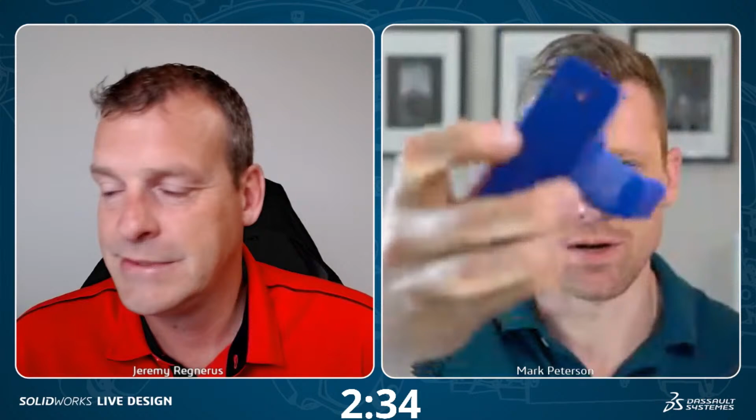Yeah, it's a ton of fun. If you have access to a maker space, or like what I'm going to show today - I got this 3D printer that I stole from Mike Puckett, and it's awesome, man, you can do all kinds of cool stuff. You like the guitar right there? I printed off one of these just as an example, this little holder for it, which is pretty cool.

It's just fun, you can make whatever you want, especially with tools like this, your imagination can run wild and you just start printing stuff. I can't imagine what it must be like if you have kids, they love that stuff. You make a cardboard box - because that's what kids like, right? They start playing with the box the 3D printer came in, like 'this is awesome, Dad.'

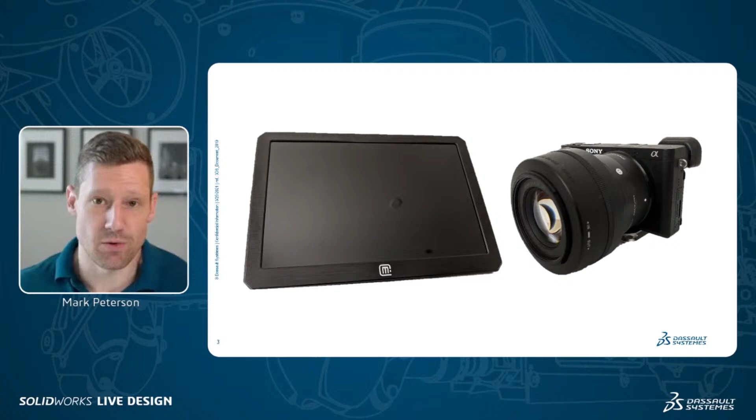So I wasn't using this anymore, so it was just collecting dust in a drawer. I thought, can I just put this monitor on top of this camera, and then I would be able to have a better connection with my audience when I'm doing that sort of thing.

So I was like, okay, well what's going to go in this space? On top of the camera is like a little rectangular input called a hot shoe. And I have this little guy here — let's see if that works. It's got kind of a rectangular profile on the bottom, and then it has a quarter.

Mark, I'm having a bit of a connection issue here. Looks like you froze up a little bit. I don't know if you freaked your camera out by trying to get it to autofocus. Oh, sorry, hold on. Let's see. No, let's see if that. You're good now — it was literally like when your camera tried to autofocus, it kind of glitched. Oh, really?

Okay, alright, sorry about the technical glitch there. So that's the thing we're going to do. We're going to try to create something that's going to work with that quarter-20 thread. So let's get into SolidWorks and we'll get started finally after that huge intro.

Cool, so hey, along the way — Mark, quick question from chat. Joe Zenkis wants to know if this part has been sponsored by Binford Tools. Yeah, definitely. That's — I should have put some plugs in there.

That's funny. Yeah, cool. So along the way I'm just going to pepper in some tips and tricks. A lot of them we've shown on this live design before, but it's always good to reiterate some. So I'm just going to start with a millimeter template, a part millimeter template.

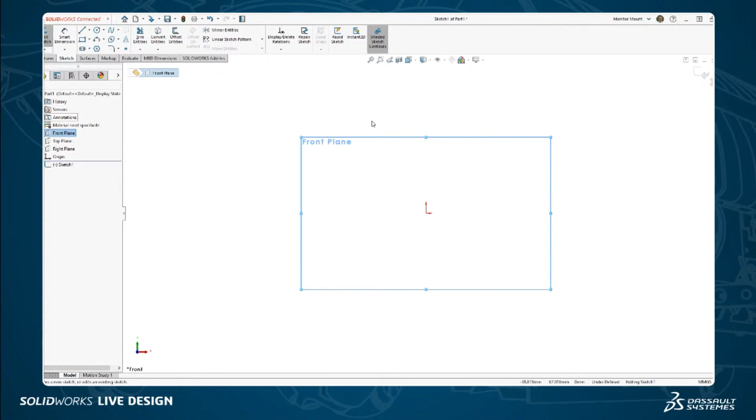The first thing I want to do is design the monitor itself, because that'll give me an idea of what I need to wrap around it in order to hold it. I could just measure it with calipers or whatever, but if you wanted to do this yourself, you may want to use an iPad or something that has curvature, which may be a little more difficult than the rectangular monitor I'm dealing with. So something I always like to do with projects like this is use Sketch Picture, which lets me bring in a picture of something.

So for example, here I can just open this up and I have this monitor. Now in picture format it comes in really big, so I'm going to use the F key on my keyboard to zoom to fit, and so I can actually see this thing — and we can see the monitor.

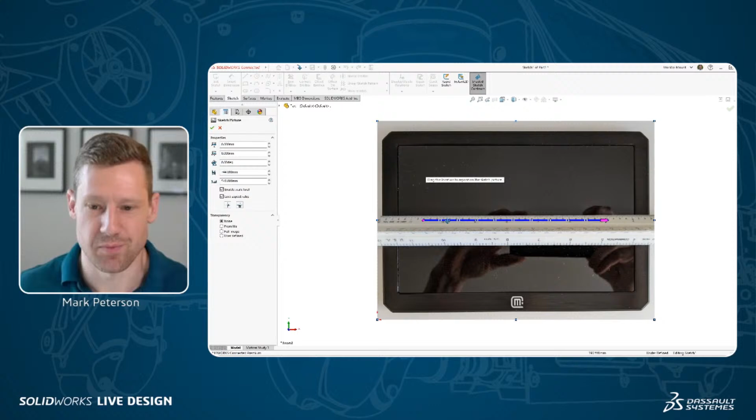And of course, for convenience, I have a ruler or scale that I put on here, and I want to size this to the appropriate size. So what I'm going to do is use the scale tool. I'm just going to drag these handles, and notice it does kind of snap to horizontal, which is nice.

So we'll put this here, and then it's going to ask me for a dimension. I'm sure many people have seen this tool before, but to me it's such a great tool — you just snap to something and you already know exactly what the dimension is. So we'll say that's 220 millimeters. Of course, it flies off into outer space, so I have to hit F for zoom to fit again, which is wild, but that's okay.

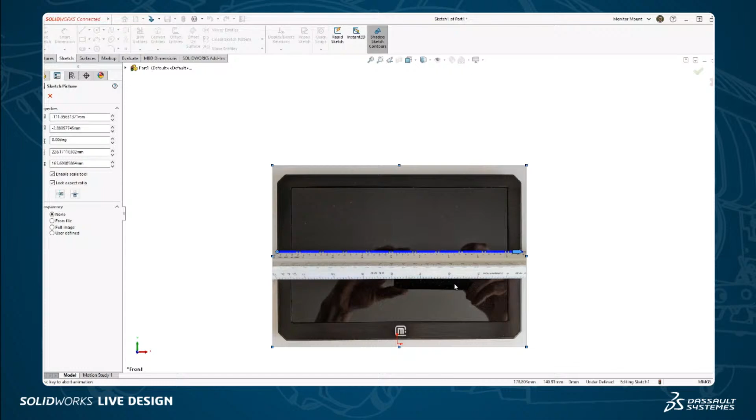We're going to kind of move this thing over, Mark. That's a really cool tip — the fact that you put your scale, your ruler, on top of the device before bringing the sketch picture in. I absolutely love that, that's a great tip for people who use Sketch Picture. Yeah, absolutely, it just gives you something that is the exact right dimensions.

So that's pretty much most of what we need to do here. I do kind of want to have this somewhat either centered or something.

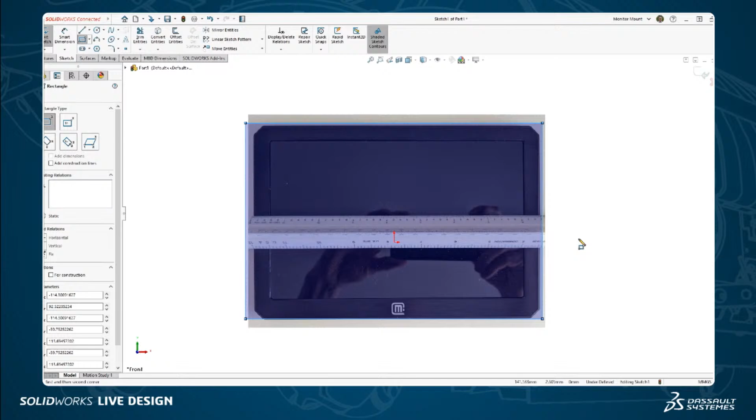So maybe I'll do some centering, but how do I know exactly where the center is? I can do some sketching in here. Let's just create a quick rectangle, something like that. This rectangle is fine, but it's not going to help me center anything. So let's try that again.

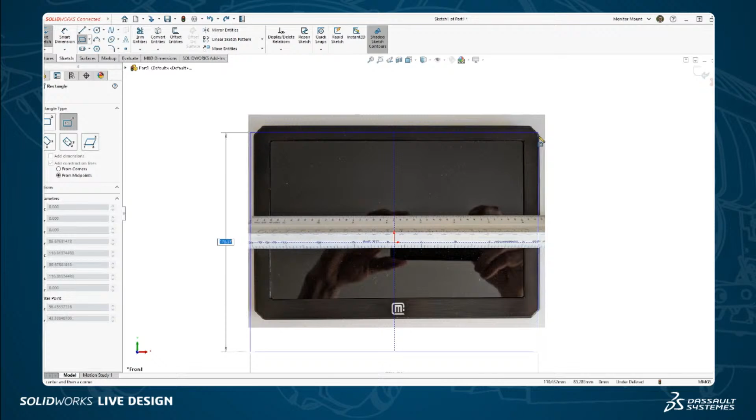I'm using my S key here to bring up this shortcut, and I have this drop down that lets me choose different types of rectangles. Instead of doing just the corner rectangle, I'm going to use the center rectangle, on this origin. The idea with this rectangle isn't to have the exact right dimensions, it's just something that gives me a gauge I can use to center my picture on. So I have a rectangle here that's about the right shape.

It's not super important, I want to get back into that sketch picture. So I'm just going to double click on the sketch, and drag it around until it's about in the center, which I think is right about there. Again, it doesn't have to be perfect, we just want to get things about right. Okay, I've got that. I don't need this rectangle here anymore, so I'm good. I'm going to exit my sketch.

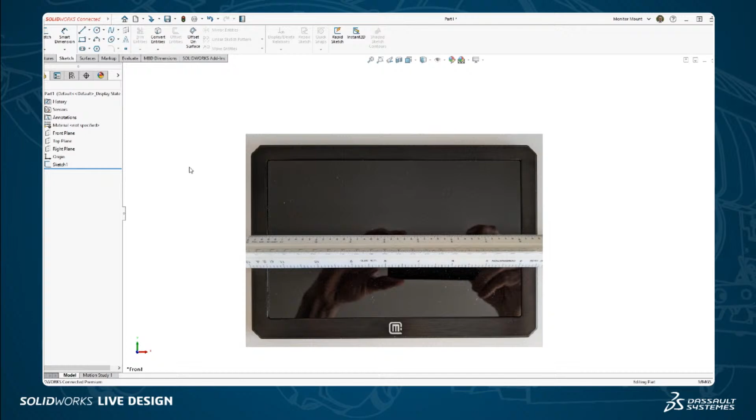Now, a lot of people might go ahead and just start sketching around this in the sketch where the sketch picture is located. But a real big tip here when using sketch picture is to only have the sketch picture in that sketch. The reason why is you can come in here and hide this later very easily just by selecting the sketch and choosing to hide or show. We're going to be using that a lot, especially when we do sketch picture.

So that's the front of it. We do want the profile of the side or the top, so let's choose our top plane. We'll sketch here, and again we're going to use the sketch picture tool. And if you're wondering how did I get sketch picture on this toolbar, we can customize any toolbar inside SolidWorks, it's highly customizable.

So of course we'll go here, and if I want to search for something like sketch picture, I can just search for it and then drag and drop these on here. And if you don't want it on there, you can just pull it off and get rid of it, you see my little X next to my cursor. And because of that customizability, I can put extruded cut in there.

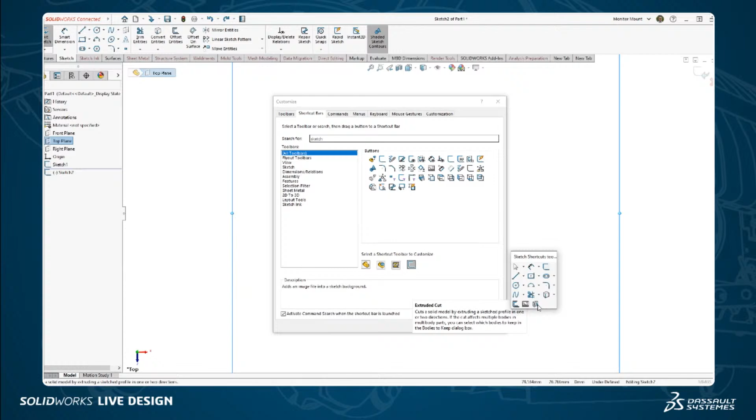Hold on a second, Mark. We have an interesting comment from Mike Puckett in chat, and I think this is a great question to ask the chat. Mike says S keys greater than mouse gestures.

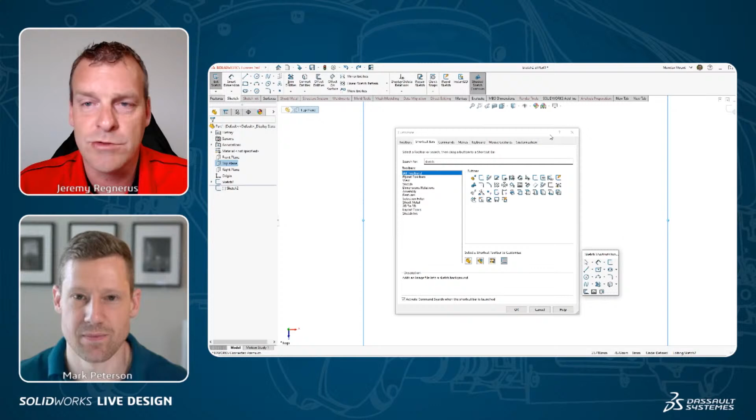So I have a question for the chat. If you use the S key, press 1. If you use mouse gestures, press 2. If you use them in combination, press 3. Let us know what you're using, S key, mouse gestures, or both, 1, 2, or 3. That's a great comment, Mike, because I'm not going to go into the debate about which one's better, but I'm curious what our users use more. Press 0 if you don't use any of them.

Sorry Mark, keep on going. No, I'm interested in the results as well. I use the S key a lot. I think the benefit to me of the S key is if there's not a command in my shortcut toolbar, I can just start typing and the command will come up in command search, which is nice.

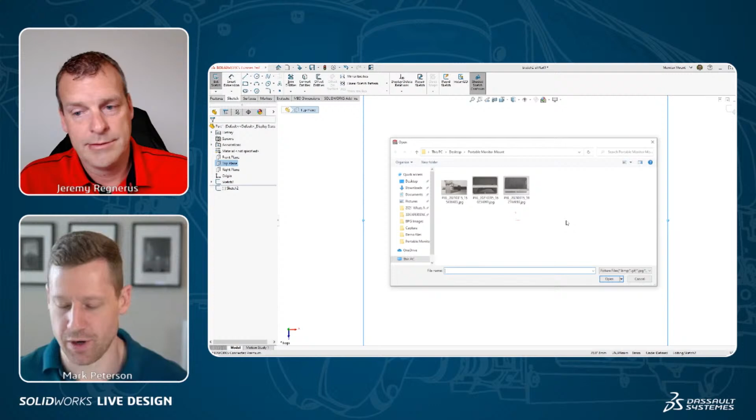So okay, let's get this other sketch picture in here. And you know, sorry, one other thing I want to do here, let me just close this out. Okay, let's go back to this original sketch. I do want to have a midpoint line in here, and you'll see where this line is going to come into play in just a second. So I just want this midpoint line in here, and that's also going to be 220. I'm going to use this line to snap my new sketch picture to.

So let's go to our top plane, and we're going to repeat our sketch picture. So I have this one here, we'll open that up, and again it comes in pretty large, so F for zoom to fit. And I have a pair of calipers here.

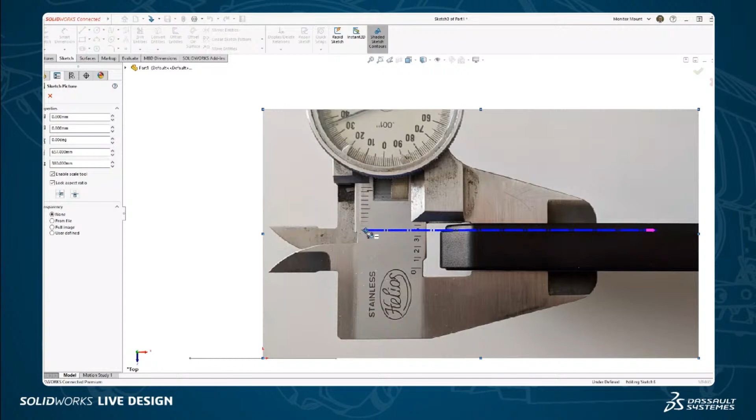So I'm just going to use the ruler on the calipers, which is going to be pretty convenient. I'll just drag and drop this onto here. That's going to be 10 millimeters. And we can kind of move this over here.

Now the orientation, because of the way I took the picture, the front of the device is up here near the top. But that's okay, because in the sketch picture properties, we have options to rotate and turn things around. So for example, if I want to rotate this around, I just type 180 degrees and I can move it around. So it's very versatile, being able to use this tool. I'm just going to kind of drop that again. It's pretty close to in place somewhere, something like this. There we go.

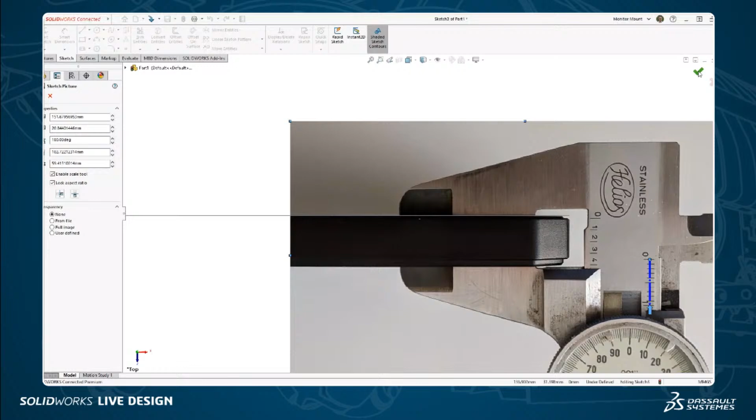Perfect. And again, I'm going to exit that sketch because we don't need to have any other sort of sketch elements in our sketch picture. So there we go. So we have those two in there and we're ready to start designing.

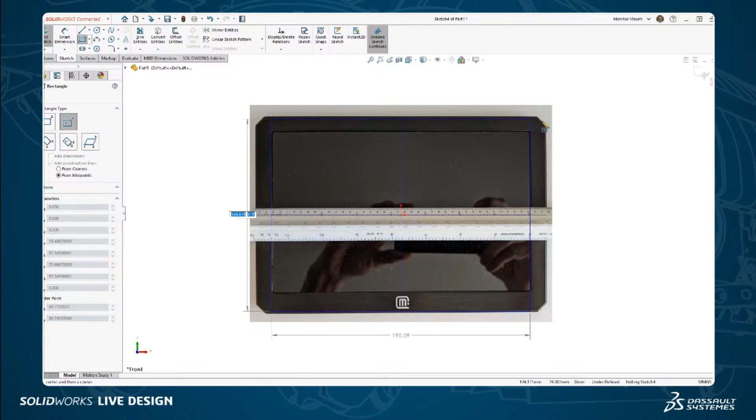Let's go to our front plane and we'll sketch here, and we can do our center rectangle tool again. We'll pull out a center rectangle and get it just like so. You'll notice that the picture doesn't line up with the sketch. And the problem isn't the sketch - the sketch is truly accurate. It's the picture that's the problem. Most cameras have some sort of bend or angle to them, depending on how you take the picture. So don't let that get in the way of a good time here.

So all right, let's add some dimensions. We know that this one is 220 for sure. We don't know the vertical one, but it's very close. Let's say 130 is about right, and we feel pretty good about that.

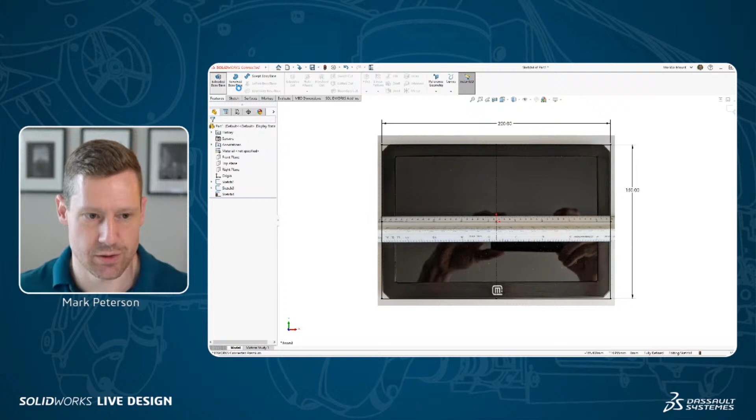And so let's extrude this. So we go to features, we'll extrude that. And of course, we have our sketch picture here, and we can even use this to determine how much we should extrude. So should it be 11 millimeters? It's about right. Maybe 12 makes more sense. Maybe 11 and a half.

Mark, I love your use again of a measuring device on your sketch picture. This is like a really cool tip. I know you've been working for a little bit, I'm kind of going back to it. I like how you actually put the measurement on the calipers themselves. What a genius way to get your scale down. Yeah, the whole point is try to get as accurate as possible with these. In a lot of cases when you're doing sketch picture stuff, it's usually off of a drawing, and they're sort of giving you dimensions. So it's very infrequently that you would necessarily have to use it in this way, but sometimes you do, and this is a great way to try to get as accurate as possible.

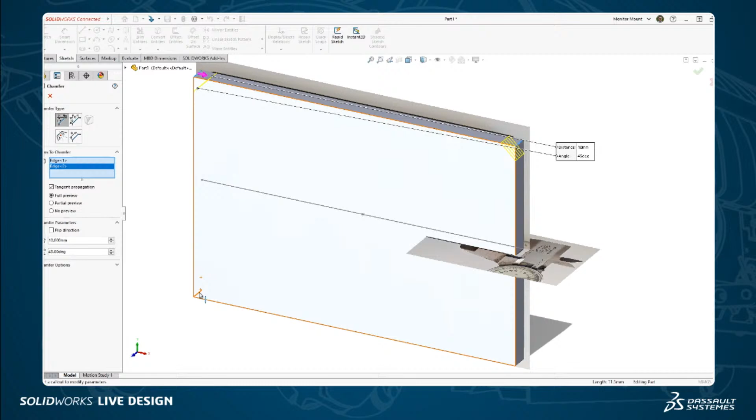So, okay, cool. This device has some chamfered corners. So I'm going to select this edge and choose chamfer. I love doing chamfer this way just because it's very easy - I already know what edge I'm going to select, so I just put the chamfer on there. I'm going to select these different edges. I love in SolidWorks how you can just pick through geometry. It highlights that edge for me, so I don't have to rotate things around or anything crazy like that.

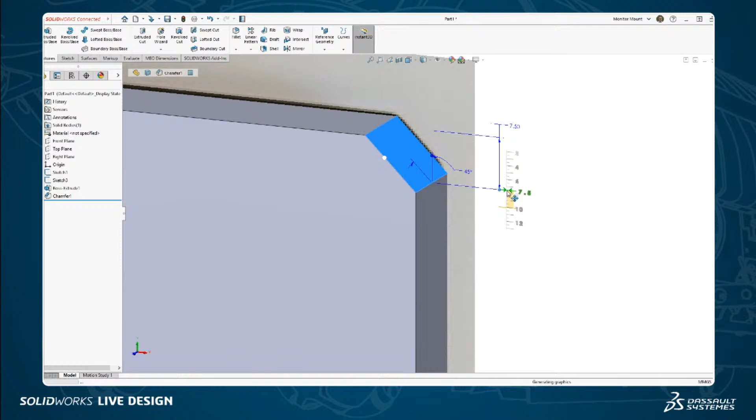And then we'll confirm. Now we'll see from my sketch picture that my chamfer isn't quite right, but I'm going to use Instant 3D. Just so everybody knows where that is, on your features toolbar, you've got this Instant 3D here, which means I can grab this blue orb and I can just adjust it. I can drag it against this ruler to get these exact numbers, or you can kind of freehand it if you're left of the ruler. So notice I can go as fine or as granular as I want to on this. I'm going to make it like 7.5, something like that. Just put it in there.

I'd also like to fillet these edges here. So let's go ahead and get those fillets going. Now 10 is going to be a little much. Let's maybe make it 3 or something. And notice when I click on another filleted edge, I do get this pop-up here. So I can kind of zoom out. So when I click this edge, we see that I get this pop-up - this is my little fillet selection helper.

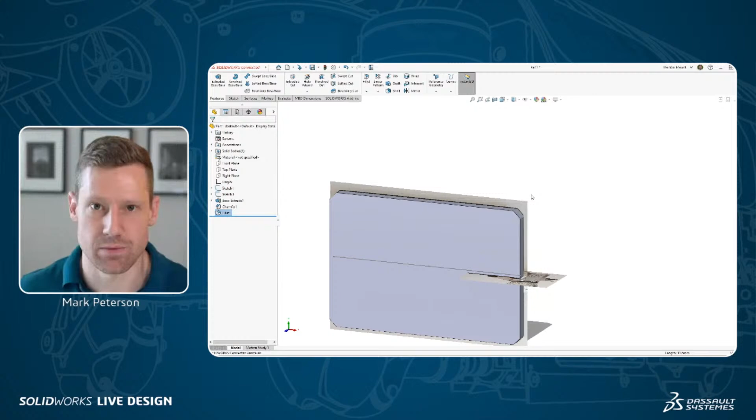Notice that it's going to collect all 6 edges that I actually would have selected myself manually, but it's going to do that all in one go. That's just a super handy tool for us designers, it saves us a lot of time.

So Mark, we've got our results in, and it's 3. A lot of people use a combination. Mike Puckett said maybe he should have bribed people with some CSWP certificates to vote on his side. But that's great, I love seeing that a lot of people are using all the tools that are going to make their lives faster as much as possible. So that's really good. And then Brian Zaya said 3, but 1 is awesome, especially in 2022.

Did you watch 3D Experience World virtually, Mark? I watched it all week for like hours and hours and hours, I don't know if I even took a break to eat. If you're watching at home and you haven't watched the technology previews or the don't miss this demo sections, go back to 3D Experience World and watch those technology previews. There's a really cool enhancement coming to the S key in 2022. Yeah, definitely go watch that for sure.

Okay, cool, so let's continue on now. I'm going to hover over my solid object and hit tab, it hides it for me even in part mode. That used to only work in assembly mode, and a couple of years ago the developers changed it so we could do this in part mode.

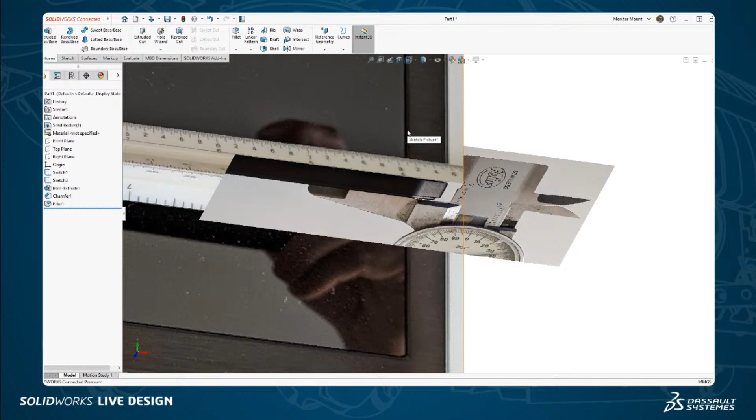You'll notice there's sort of this feature here that goes around the face of the part, it's kind of like this indent. So we want to replicate that. I'm going to use Shift Tab to bring my part back, and let's go ahead and start sketching on the top plane. Now this is actually here, so let's hide it again using Tab, and I'm just going to use my line tool to kind of create some geometry here.

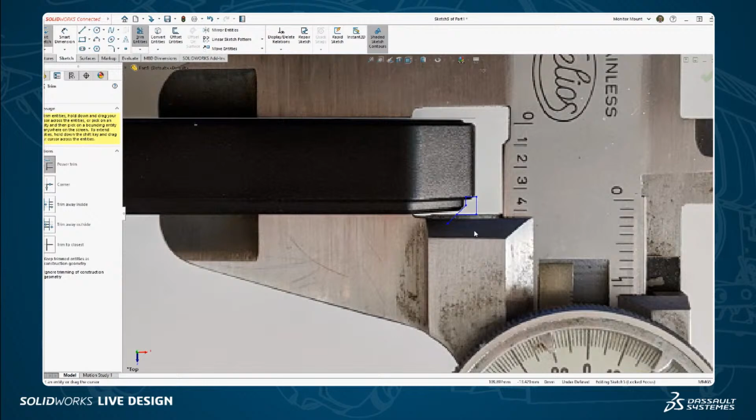Doesn't have to be perfect, but I just want to create a little bit of a cutout. So let's do something like this. There we go, I guess a little extra piece here, I'm just going to trim that out using my trim tool. There we go, it doesn't have to be perfect, I'm just trying to get something that's relatively close. And actually I do have a little bit of something here, so let's do that. Sorry, I'm making a mess of my sketch here. Normally I'm way smoother than this. All right, I'm going to just merge these two together. There we go, so now I've got some sort of thing here.

We really want to make sure that we always fully define all of our sketches. The reason for that is because fully defined sketches are a lot easier for our CPU to process. If we have a bunch of underdefined sketches, there can be some complications for our processor, and it could make our parts slow and perform less well.

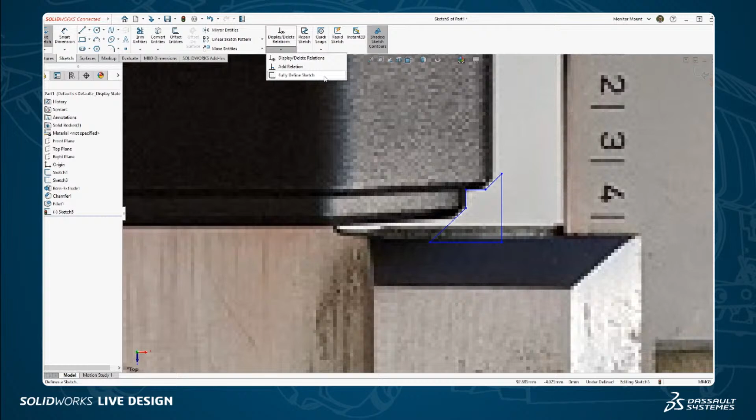However, I don't really feel like fully defining this because it would be a lot of work. So this is a tip that I use sometimes when I'm just trying to get something done. I don't recommend doing this in production all the time, but if you're just playing around, it can be pretty useful. On your sketch toolbar under display delete relations, there's a drop down, and there's this tool here called fully define sketch. It's a way that I can just define the sketch by hitting calculate, and everything is fully defined and we're good to go. Again, I wouldn't always use this in production, but it is kind of nice to have it here.

A good example where you might use something like that, Mark, is you download a part from a supplier catalog and they didn't fully define it, but the geometry is what it has to be, and you just want to lock everything down. I agree with you, you should never have minus signs in front of your sketches in the feature manager tree.

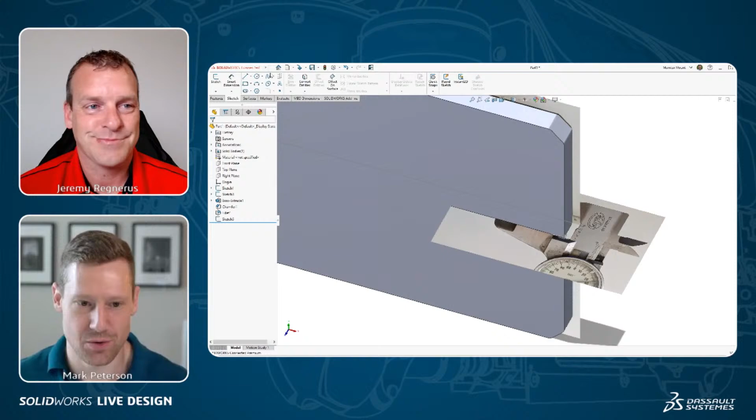So I'm using it here, and we're just going to do a quick swept cut. I'll go to my features tab, choose that as my sketch profile, and for my path I'm just going to select this edge. It's only going up to that corner.

Let me expand some of these options here. There's this tool called tangent propagation, which means any tangency will just continue along that path. And then we can make that little swept cut just like that. Pretty nice to have that in there.

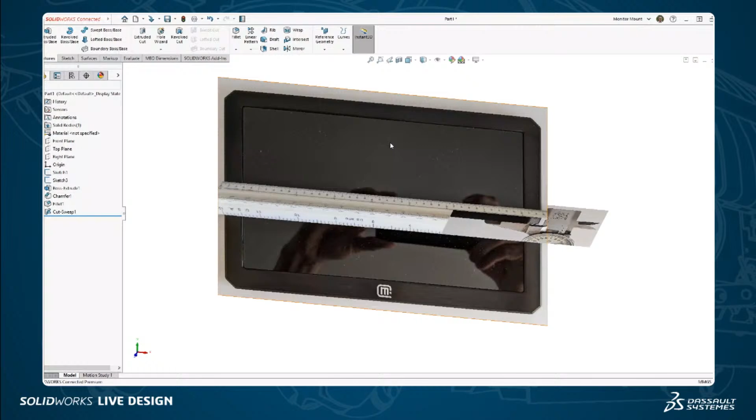This is starting to look a lot more like my actual monitor. However, it's missing a screen, so we can create something like that. My solid is kind of in the way, but we do see sort of what that screen is supposed to look like. So let's sketch on this front plane, do an offset entities, reverse that direction, hit check, and confirm that.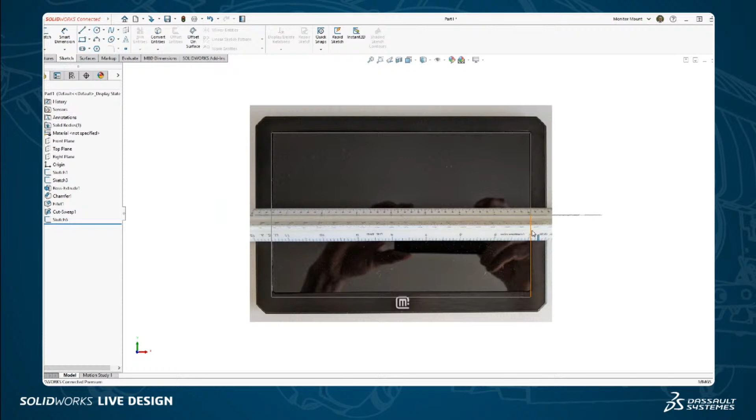Was I close? Yeah, that's pretty good. Ooh, and we're very close. Yeah, we're not trying to build a rocket here, so I just want something that's somewhat similar to the design. Let's go ahead and do a quick extruded cut.

We'll select that, and it needs to be maybe a millimeter deep or something. Okay, cool. Now that looks like a portable monitor. That looks pretty good. So this is something we can now use to create our little stand for our monitor.

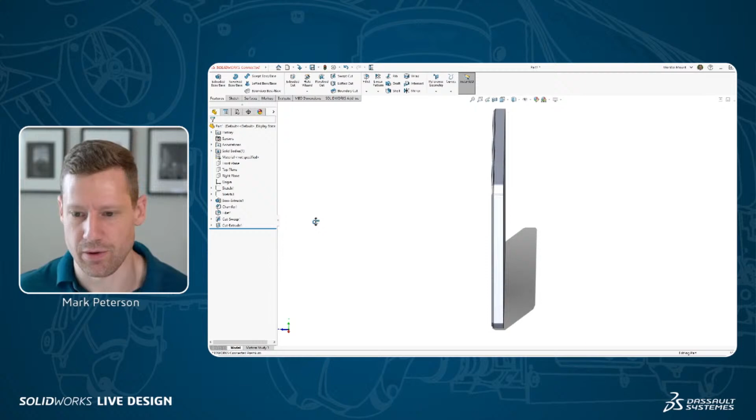Remember, I have all these sketch pictures in here. I can just control-select them and hide them if I don't want them in my view. And now my view is nice and cleaned up. That's another reason why we only put one sketch picture in the sketch, nothing else.

Okay, so now for the part that's really fun, which is to create our cradle. So what I'm going to do is go to my right plane, and I know that I want to do an extrude.

Something I've done is customize this menu to include an extrude or cut. This is a nice quick shortcut, because most of the time we create a sketch and then go up to the command manager to find the tool. If you're always using extrudes and cuts, you can just start with an extrude. There we go, I'm going to do that again.

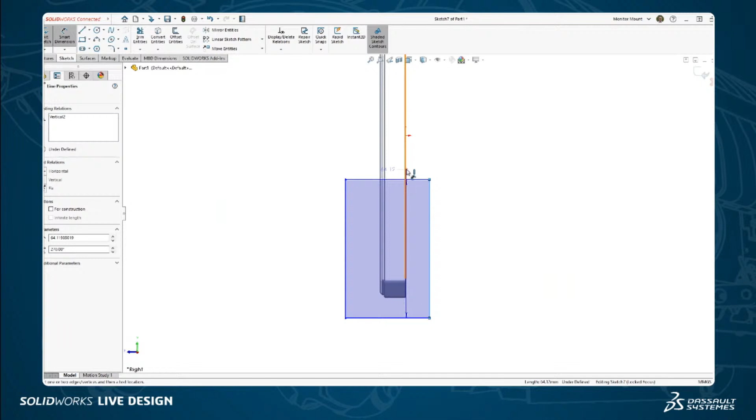That's going to give me a chance to create my corner rectangle. Good, so this is kind of what I want it to be, but I want it to be maybe 2 millimeters thick. Let's grab our dimension tool, and I'm just going to dimension off this geometry. We'll say that's 2 millimeters from that edge, and 2 millimeters from the front.

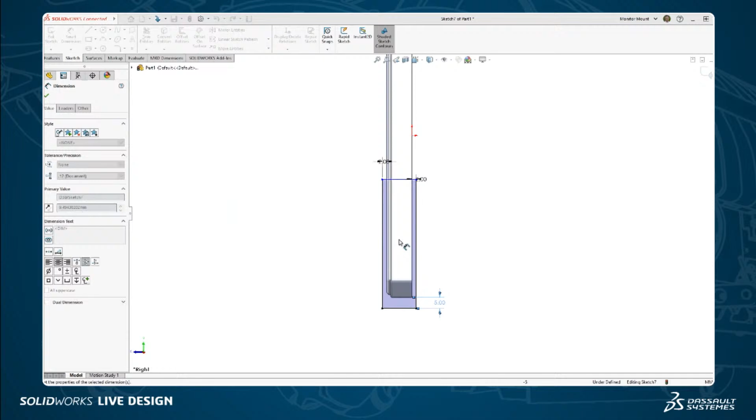On the bottom, however, I need it to have a little bit more because of that quarter-20 thread. I want it to have some space to thread into, so let's make that 5 millimeters. And let's give it an overall dimension, let's just say 30 for now. Of course, we can always change this.

So now, Mark, I notice you're starting to design the cradle within the same part that you modeled the monitor in. You're not using an assembly. How are you going to mitigate these parts just merging into one giant solid?

Yeah, that's actually a great question. So as soon as I exit this sketch, we're going to see that extrude property dialog pop up. I'll use my D key to bring the confirmation corner to my cursor—just another time-saving tip, the D key on your keyboard, D as in David. And now we have our property manager here on the left-hand side.

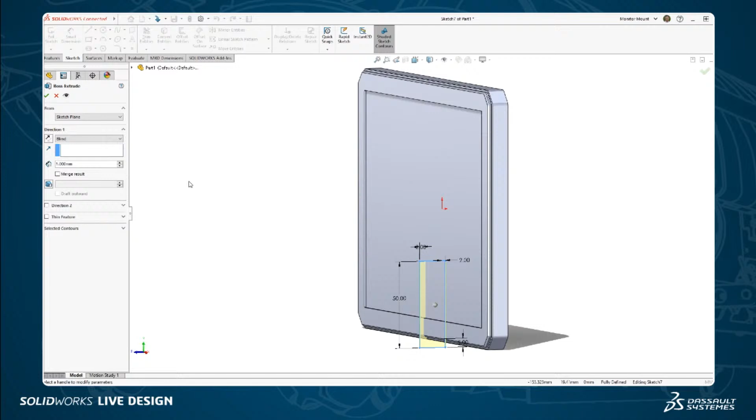By default, SolidWorks is going to ask you if you want to merge the result of these two solids. If we did that, it would just make them one chunk, one single entity, and we don't want that in this case, just like you were pointing out, Jeremy. We actually want them to be two solid bodies. So if I uncheck this box, we'll see it's going to have the two solid bodies in here, and then we can use some Boolean methods to subtract, for example. So, okay, let's create that solid body.

I don't want to do blind. I could just say I want it to be blind up to some amount. But remember, I want my wall thickness to be the same all around, to be consistent. So really what I'm looking for is for this face to be extruded just 2 millimeters beyond this one.

This is where we use our drop down for our end condition and build in some design intent into our design. I have a lot of different choices here, but the one that's most appropriate for this use case is offset from surface. I select offset from surface, I select the surface I'd like to offset from, and then I say I want it to be a 2 millimeter offset.

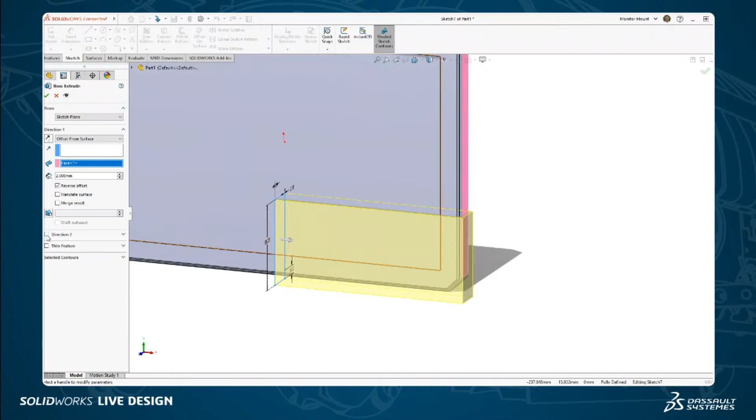The offset is going towards the inside of the part, so all I have to do is reverse that offset, and now it's sticking out beyond the part. No matter how big the part grows or shrinks, it'll always maintain that 2 millimeter distance. That's what we mean by design intent. How do we expect it to change in the future, and how do we want our body to change?

I want to do the same similarly to the other side. So for direction 2, offset from surface, we'll select our surface, choose a 2 millimeter offset, and reverse that to the outside. Okay, we confirm that. And I know that there are two bodies in my part, or in my environment here.

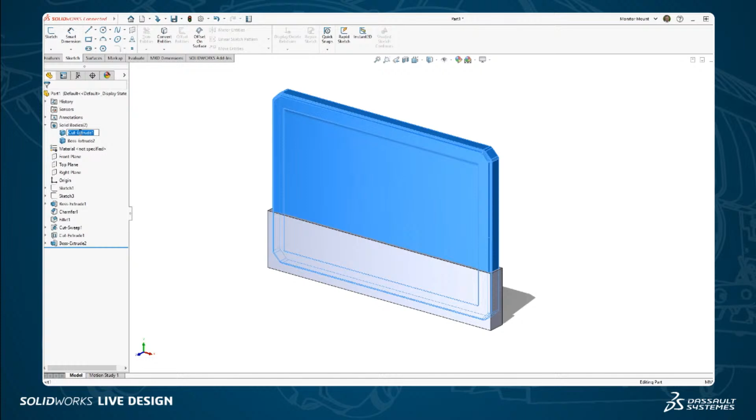There's a couple of ways I know that. One, we have a solid bodies folder here in the feature tree, and it does show both of my solid bodies. In fact, I could even go in here and rename these. I could call this monitor, and I could call this cradle, for example. We can name those, and that's a nice feature for us to be able to do. Another way that I know I have two solid bodies, and I might ask the chat, but...

we are moving pretty slowly on time, so I'm just going to move on with it. But notice that there's hard edges, like these dark edges here, on these parts, but where the parts intersect with each other, there's no dark edge there. So it's just kind of like gray. That's another way that you know these are two separate solid bodies inside your workspace here.

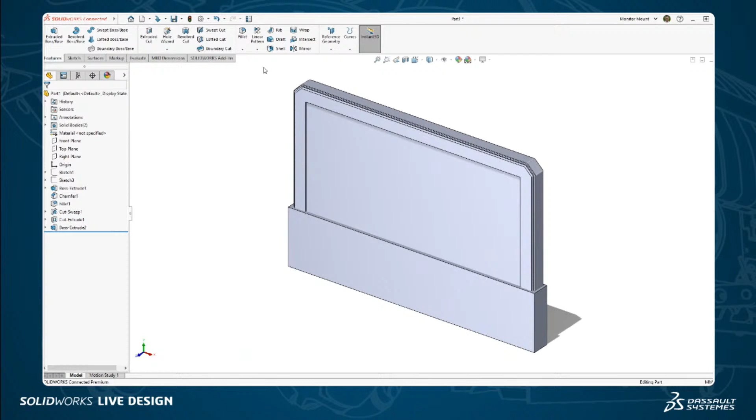Okay, so what we want to do, of course, is subtract from the top body. We want to subtract the top body from the bottom body. In SolidWorks, there's probably 3 or 4 different ways to do this. Just for convenience, and just because I like this tool, I'm going to highlight the intersect tool. So the intersect tool allows you to just select however many different bodies you have there, and it's going to create regions that they intersect, that they overlap, and that they don't overlap.

All I have to do is just select, in my graphics area, the items or the kind of areas or regions that I don't want in my final part. So here you can see this is just a very quick way to do sort of that subtraction method. And now I have just the sort of cored out body there.

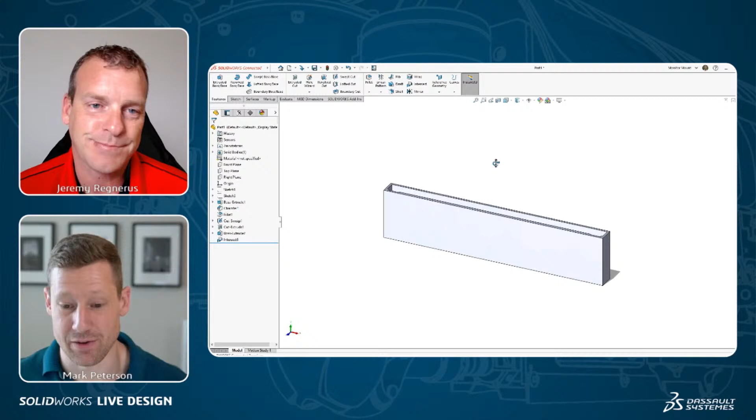Pretty cool. Okay, we do want to create some more geometry here. For example, the front part of my screen, you don't really want to be blocking your screen there, right? Also, right now, because you subtracted that, it'd be pretty hard to get that in there past that lower lip. That's true, yeah, and the lower lip would kind of interfere here as well. Yeah, so what we want to do is just want to kind of cut that out. Well, let's do it this way.

If I select this face, which is the exact geometry I want to cut, and choose to do a sketch here, notice that face is still selected. So I can go right to converting entities in my sketch, which pulls in the outside edges of that face into my sketch, and then go right to an extruded cut.

Right click through all, right click to confirm, and there it goes. It's gone like magic. So that's a really quick way to get rid of that material I don't want to see anymore.

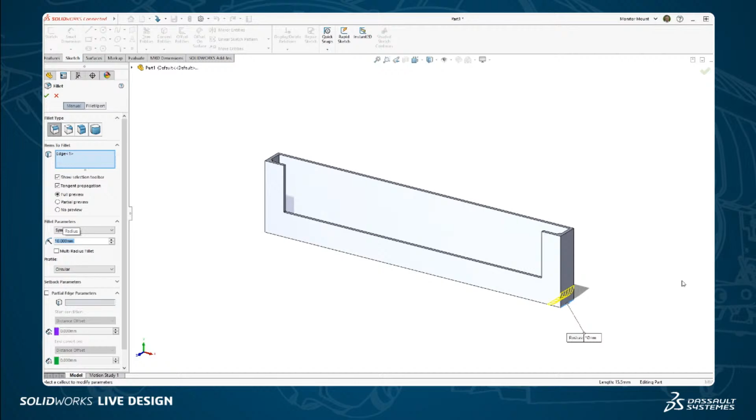Some other things we want to do, maybe round off some of these corners. So we'll do a quick fillet here. Let's say, is 10 too much? Who knows, maybe not, maybe so. Looks pretty good to me, Mark. I think it looks all right.

Jeremy, I'm having a hard time grabbing this edge here. This can be a big frustration because SolidWorks doesn't know what I want to fillet. It's thinking it could be any one of all these edges, but unfortunately I want to fillet the smallest and thinnest edge that exists in the part. So how do I grab that? It's trying to give me all these faces and stuff.

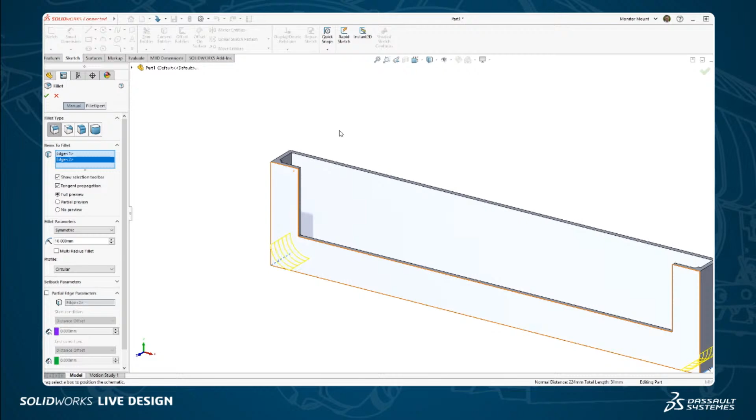Well, one way to do it that I like to use is selection filters. I have a keyboard shortcut, default for everybody, it's the E key, as in Edward. If I click on that, notice next to my cursor I have what looks like a purple tornado - that's actually a filter, and it allows me to only select edges. It makes selecting that edge super easy. So I have that. Boom, there we go. Now I've filleted those things off.

And this is actually starting to look like a real part. However, no matter how much I shake my mouse, that thing doesn't go away, so it's still attached to there. So how do you get rid of it? Sometimes what a lot of people will see is they'll accidentally hit a key on their keyboard, and they'll have this filter there and not know what they're supposed to do with it.

So there's a couple things I'd recommend, and they're either going to be the F5 or F6 key. If you hit F5 on your keyboard, you're going to get this filter, usually it shows up down here - mine's always on the bottom of the screen. So you have this UI you can use to get rid of them. F5 will get rid of that again, or you can also hit F6, and F6 will just clear out any selection filters you have.

So if you're writing anything down at home today, I'd say that's a really good one. F6 is like the key that gets you out of trouble a lot. I can't tell you how many times I've done that - I hit V or E or something like that, and yeah, exactly.

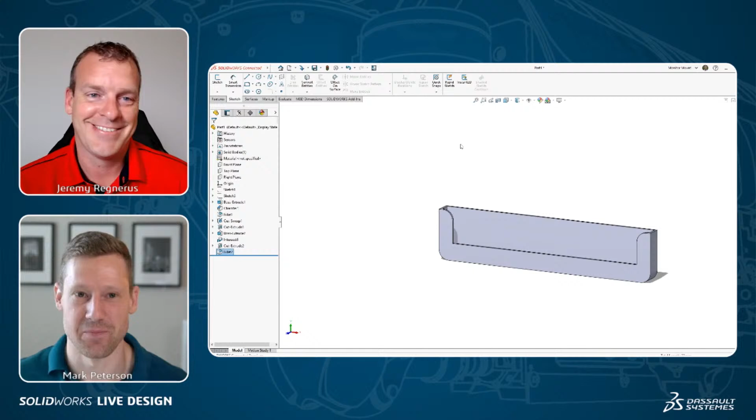Okay, we're almost done with this design. We have one last thing to do, and this is where I introduce the thread tool. I think this is just a really great tool. However, before we do that, I want to create a hole using the hole wizard. So let's go to features, hole wizard, and I'm just going to get this prepped up. Hole wizard, for anybody that doesn't know, is just a library of hole types you can access - countersunk, counterbore, all that. It's all built into the SolidWorks interface.

So what I want is this straight tap thread, and I can choose from a lot of different standards here. ANSI inch makes sense for me in my case because I have a 1/4-20 thread that I'm planning to thread into this thing - it's going to be a tapped hole. You do have some options here as well, sizes range from very, very small to very, very large. I have 1/4-20 is what I'm looking for. Again, we can choose things like the end condition, as well as near or far side countersinks. In my case, a near side countersink would be helpful as you try to get the thread started.

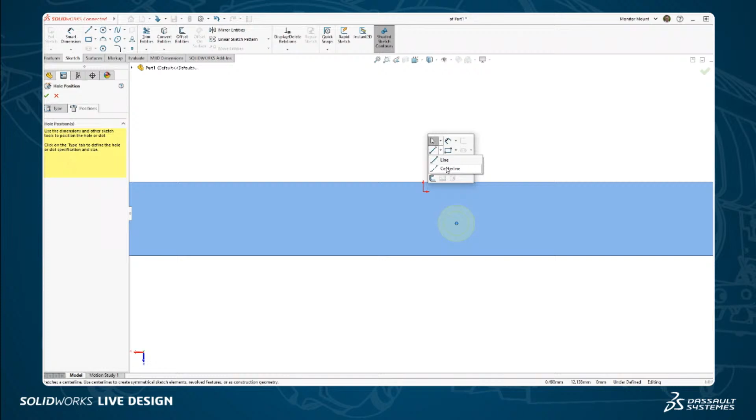Let's go ahead and do that. I have all my settings set. Let's go to positions - all I need to do is select the face I'd like to position the thread on. Notice it gives me this preview. I'm just going to drop this in here, and it's going to place a point in this sketch it's creating on the fly. You can put as many of these as you want, but I only need one, and it needs to be in the center. Nothing's going to stop me from using my S key to access some sketch tools, and I'm just going to create a quick center line by hovering over that edge and grabbing those midpoints, so I know it's going to be right in the center of my part.

Then I'll grab my point, which I can drag anywhere, and just hover it over that line. It's going to reveal that midpoint of that line, drop it right on there.

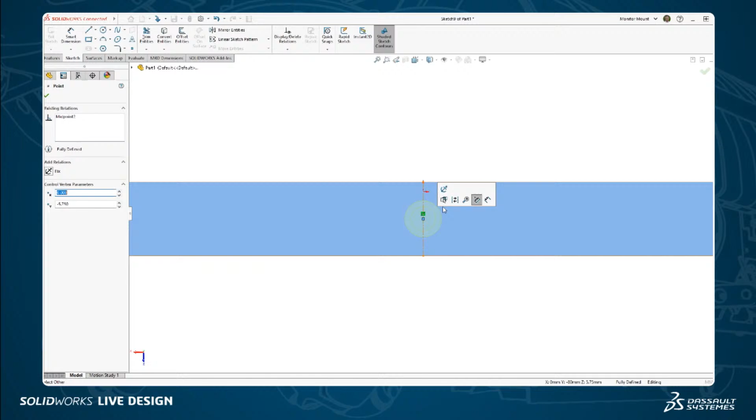So now we got a couple comments about the filters, Mark. I think people like that. Eric likes the term purple tornado, and Mert Kapkin says that filter icon drove me crazy last year. So F6, I'd put a Post-it note right on your monitor to remember. Yeah, that's how you get rid of that. Yeah, but don't use it like most people do as your password. It's not a very secure password.

Okay, so we have this here. Now we could 3D print this part, and that would be fine. However, notice that the threads are not going to engage very well here. There's going to be some material, so I'd have to thread it myself. And me personally, I don't have a tap and die at Casa del Mark. So I have to do something different here.

And this is where the thread tool really, really helps out. So yeah, I mean, think about it. So for most people, the hole wizard is where they need to go, but you're dealing with a very unique manufacturing process where you need to actually be able to print those threads out, right?

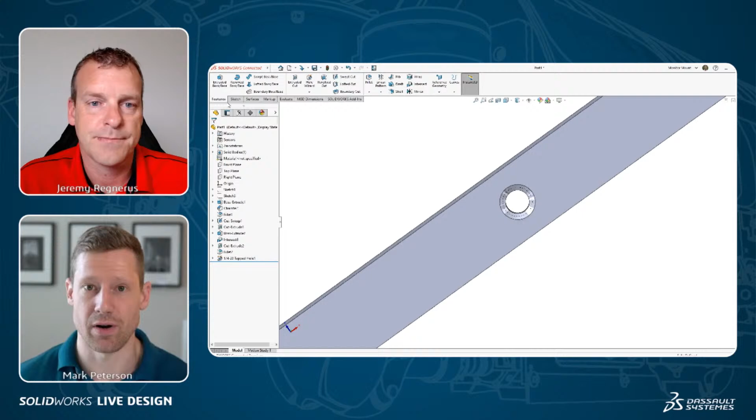Yes, yeah. Now the nice thing for me is that this is a 3D printed part, and the plastic that I print out of is somewhat malleable, so these threads don't have to be exactly perfect. And the thread tool is a very good tool for this.

It's underneath the hole wizard. But when you bring up the thread tool, it will give you this warning about the thread types and sizes. This is just a general warning that not everybody's thread is going to be exactly the same, so you want to make sure that you double check and verify that the thread profile is going to be correct for your particular use case.

So I'm just going to say OK here, because whatever thread is going to be in here is going to be about right for me. But you can customize your threads and do some pretty wacky stuff with this. I've made an auger before with this tool, which is pretty cool.

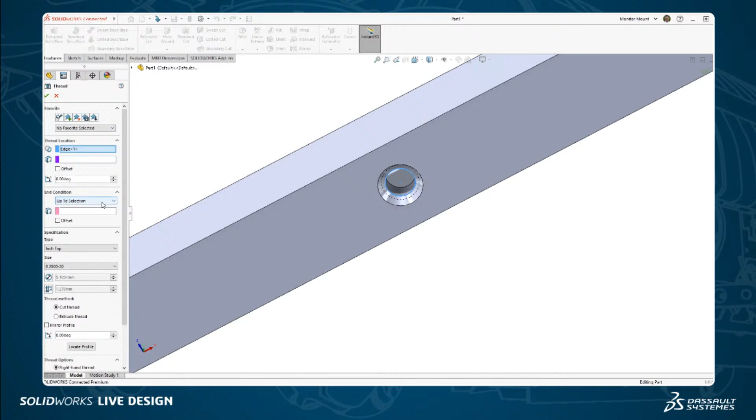So the way that this works is it just needs a place to get started with your threads. So I'll start here. And then we just want to do, we can do blind, we can do a certain number of revolutions, or just up to a selection. So let me just rotate my part around, and I'm going to choose this top surface here for where I want the threads to end.

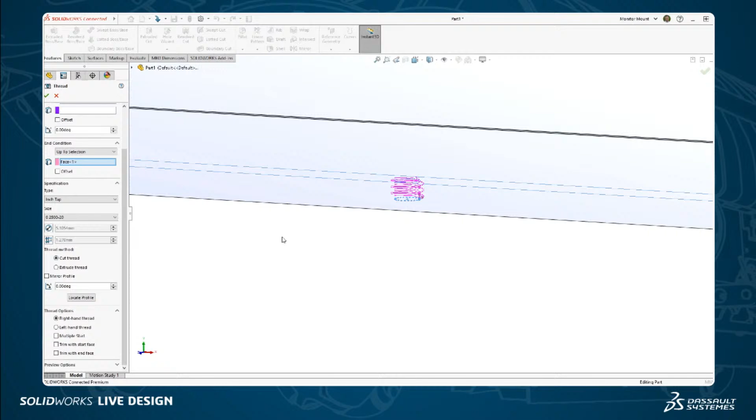This is going to be an inch tap, and it's going to be, again, 1/4-20. I'm going to use the cut thread method, and as we see from the profile here, it's going to cut these purple threads into my part. You can choose right or left-handed, lots of different options here.

Now, if I confirm this, it looks pretty good. You've got some real physical threads in here that we're going to be able to use in our 3D print. They come out the top perfectly. Unfortunately, on the bottom, they did not escape out the bottom, and that's a problem, because I would never be able to get this thread started.

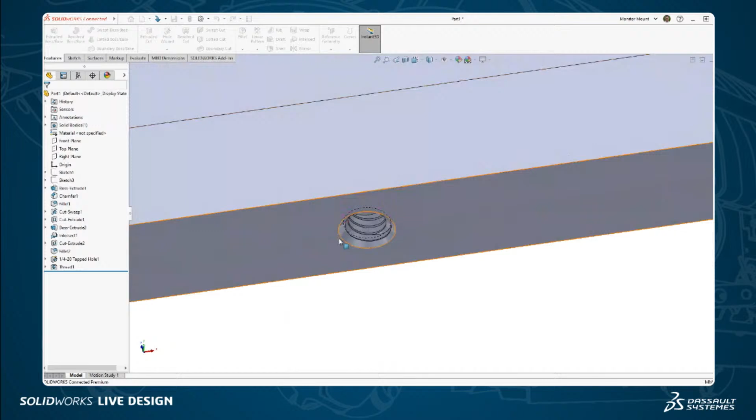So let's just right-click on our thread and edit that feature. And there is this option here, and this is going to be really useful for us, that allows us to choose where the threads start. So if I just choose this front face or this edge, I can now get that thread cut to extrude beyond just that bottom circular edge that I chose before. And now we actually have something that is usable in our print.

Okay, great. So this, I think, looks really good. I think we're right around ready to get started. Let me just go ahead and save my part, and we're going to call this, let's just call this monitor mount, and save it.

Okay, and then we've saved our part out. Now, for those at home with an eagle eye, you may have noticed that my user interface is slightly different than the SolidWorks you're used to using. I'm using a tool called 3D Experience SolidWorks. It's a role on the 3D Experience platform, and this allows me to save all of my files directly to the cloud. There's some real power and usability in that.

For example, if I'm collaborating with other people in my company or elsewhere, and maybe I don't have a 3D printer at home but they do, if I give them access to where my files are stored, they have direct access to these files. If they have 3D Experience SolidWorks, they can open this directly and go through the process I'm about to go through. So this is really huge as far as collaboration is concerned.

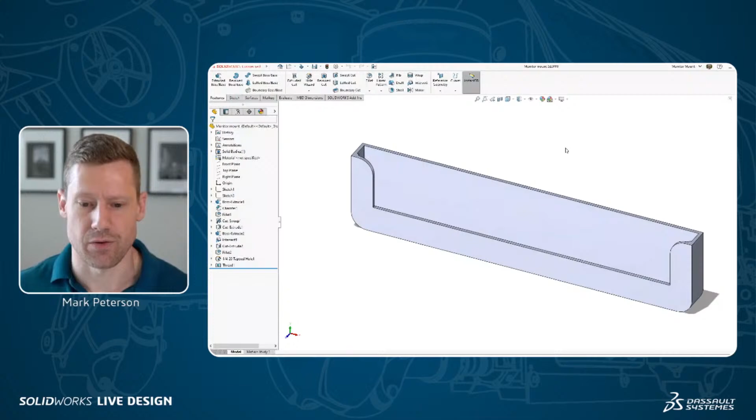So I also want to show that not only can I save through this mechanism directly inside the interface, but I can also put other files in there. For example, let's say I want to get an idea of whether or not this part will fit inside the 3D printer. If I go to File and Print 3D, it's going to open up Print 3D in my pane over here, and then you can choose your 3D printer. It's got this huge library of 3D printers in here.

The printer that Mike Puckett let me borrow—thanks again, Mike, for letting me borrow your printer. I appreciate that, it's been a lot of fun. It's an Ultimaker, an Ultimaker 2.

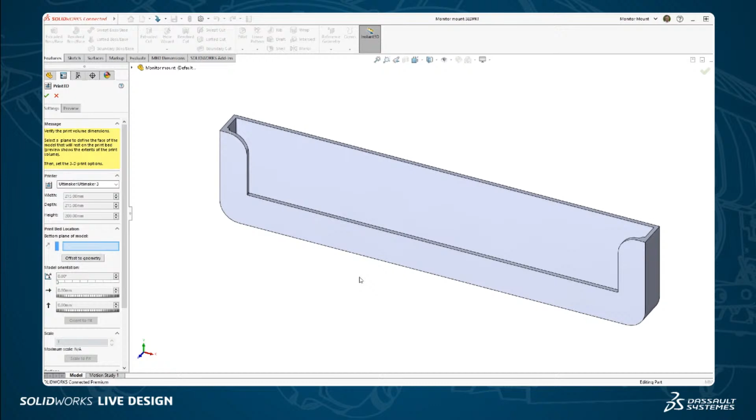So you select this out of the list, add it to your favorites, and now it's here. That gives you the overall envelope of the 3D printer. I want to select the bottom plane of my model, and if I had more time I'd go into what would be the best plane to use for the bottom of my model. But I'll skip that explanation for now since this isn't a 3D printer class today—maybe in the future we'll do one. You'll notice these red areas here show that the part is sticking outside of the build envelope, which is not good. This means the part is not printable in this orientation.

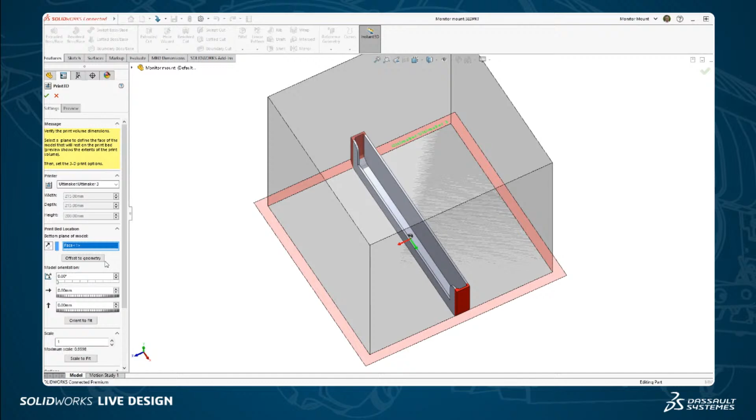However, inside this tool we do have orient to fit, and as you can see, it makes total sense—you just angle it and it's able to fit inside the envelope. So I have some reason to believe the Ultimaker 2 will be able to print this. Now, in a lot of 3D printers' footprints, there are keep-out areas, so whether or not it can actually print, we'd have to wait and see. We need to get into our slicing software before we know that for sure. But it looks pretty good, it looks like it has a good chance, and that gives me those warm, fuzzy feelings inside.

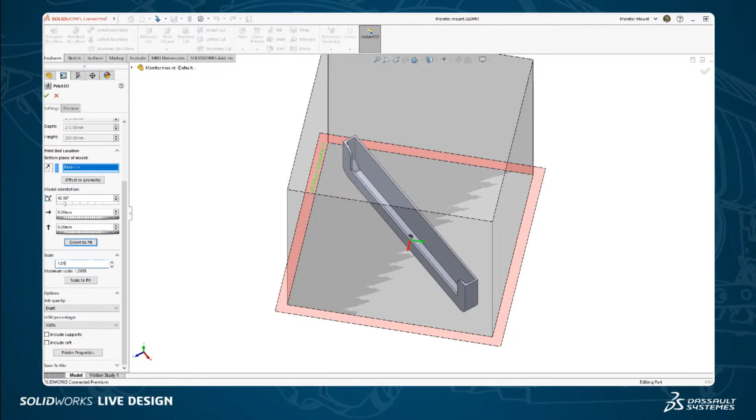We also have a scale here, and a lot of times what I like to do with 3D prints is just scale them up a little bit, maybe like 0.01 or so. This just kind of grows the model, so any intolerances in your 3D printer are taken out of the picture because you've scaled up the part just slightly. That will make sure my monitor fits right inside this thing—it won't seize up, because if it's the exact dimensions it's going to be a pretty tight fit. So we just scale that up a little bit.

Hey Mark, you've just been given the go-ahead—Mike Puckett said, "Bro, please keep it, I'm trying to declutter my place." Sounds like you better get that thing running in tip-top shape now. Oh man, awesome! Wait, you're trying to declutter your place by cluttering up my place? Hey man, that's not cool.

Also, really quick—Eric made a comment about how he loves the Hole Wizard and insists his coworkers use it for all their holes, no cut extrudes if they can avoid it. He's given a couple of Hole Wizard tips to their weekly SWUG leaders meeting. I agree, going back to something you did a while ago—the Hole Wizard is really important because it standardizes the size of your holes, especially for mechanical purposes, things like counterbores, countersinks, tapped holes, dowel holes. Things like that are really important. And what's great about the Hole Wizard is it's really easy.

You just define the center points of them and you're done.

I will also add that downstream design challenges, like adding fasteners, are very much alleviated by using Hole Wizard, because SolidWorks understands exactly what types of hardware can fit there, since you use the Hole Wizard.

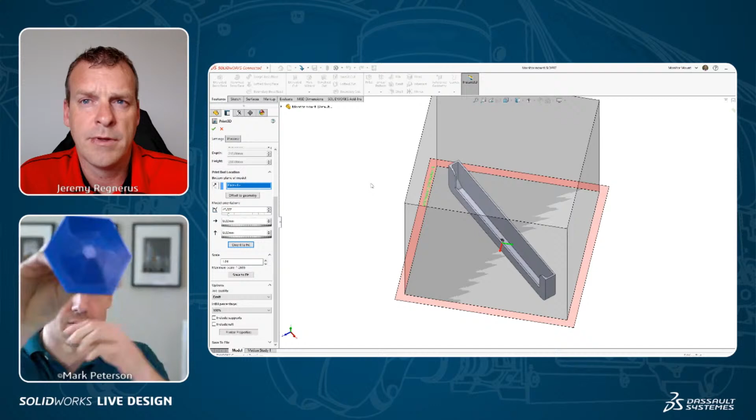I have another kind of tool here, a good example. This is like a little toy that just kind of breaks on you, I guess. But it uses these magnets, and I have these magnets in here.

I printed this off this printer. It takes magnets that are like 6 millimeters in diameter. I got 6 millimeter magnets and I could not fit them in there. I was trying to scrape it out with sandpaper and a knife and all this kind of stuff, removing so much material to try to get these 6 millimeter magnets in here. Whereas if I just scaled this up just slightly, they would have just slid right in. I could have used super glue and just got them in there, but instead I had to opt to use smaller magnets because it was such a pain to scrape out extra material.

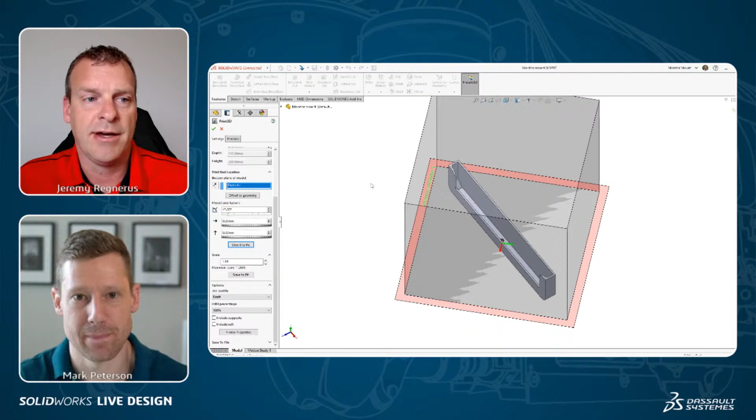So this is a great question, it just depends on your conditions. The Ultimaker is a fairly budget-friendly FDM style 3D printer, not a high-end SLA printer. Your tolerances are going to be a little bit different, and what you're trying to do is accommodate those tolerances.

If it is too loose on the threads, you can always print another one. It's a trial and error thing, which is exactly what 3D printing and rapid prototyping is all about. But yeah, great question.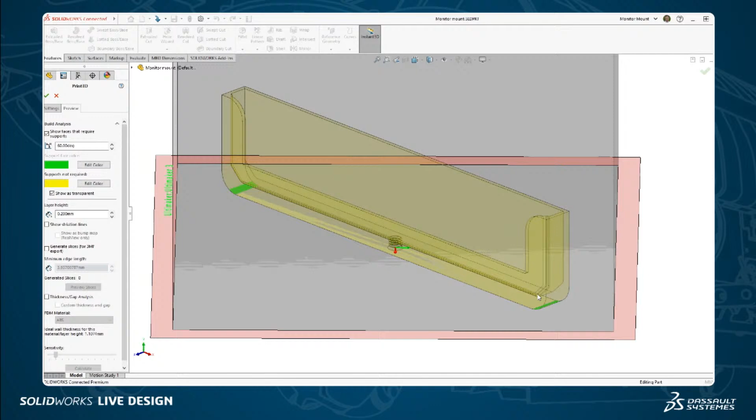I'm going to point out a couple more things in this tool. If I go to my preview tab, we can show faces that require support. Support material is sometimes necessary, since you're building this in 3D, meaning any edges that are overhanging are going to need something to support them. Otherwise, when you print it, it's just printing over air and it's going to fall down. We can see here there are some green areas that may or may not require support.

This goes back to the previous conversation, it just depends on your printer. Some printers are very forgiving when they need or don't need support. With that, you can change this angle. If I change this angle to 45, you'll notice that my thread here lights up because these threads have some overhang, and they may require some support underneath them.

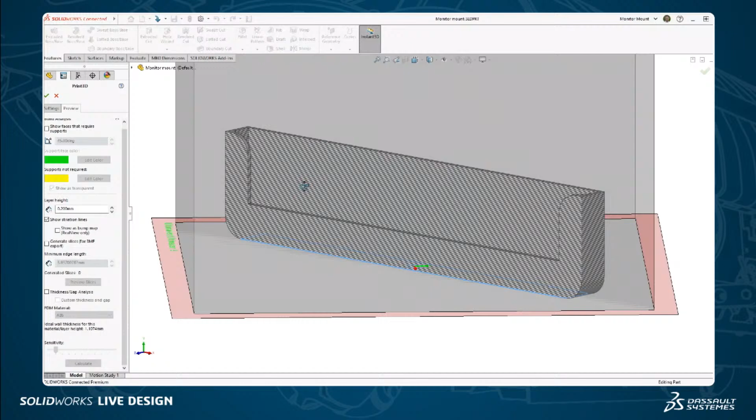So sometimes what I do is I just try it without support, and sometimes I try it with support. We can also show striation lines, so I can choose my layer height, which is how high each layer of the 3D printer is going to print. This is a useful tool because I can come in here and see, oh, okay, we have kind of these big striation lines here, so this curvature is going to have some stair stepping to it.

Now, am I comfortable with that? Is that okay? Is that maybe something I want to post-process, sand down?

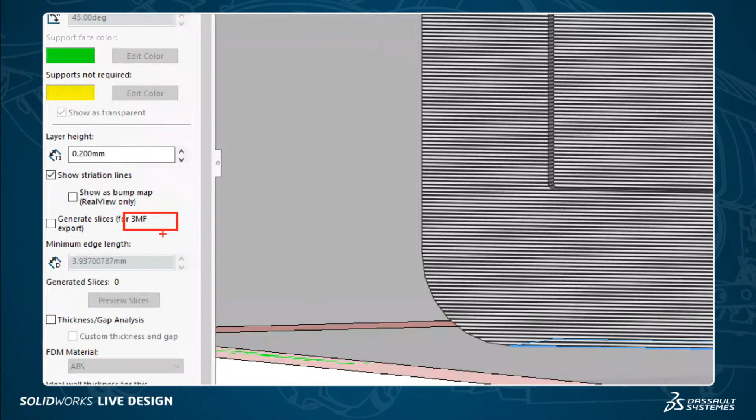These are all questions you can answer just by using the built-in tool inside SolidWorks. You can also generate these slices if you want. This gets into a workflow that may be more involved than just a personal 3D printer. If you save your 3D printed file to 3MF format, which is a relatively new format in 3D printing compared to STL, this 3MF format is specifically built for 3D printing, and it will allow you to apply colors and appearances in your file, as well as specify printer setup, like the layer height. This will actually change information inside your slicer tool to accommodate those preferences.

So it's part of a larger workflow that we won't talk about today. But what I do want to do is just show this.

Saving this out, at the bottom I can save this to a file, let's say STL, and I do have my different options here. With STL, if I go to my options, you'll see I have just a few different options around how fine or coarse the resolution of the STL is. This is going to have a big effect on the file size, which we aren't too concerned about these days, but we do want to keep file sizes somewhat low.

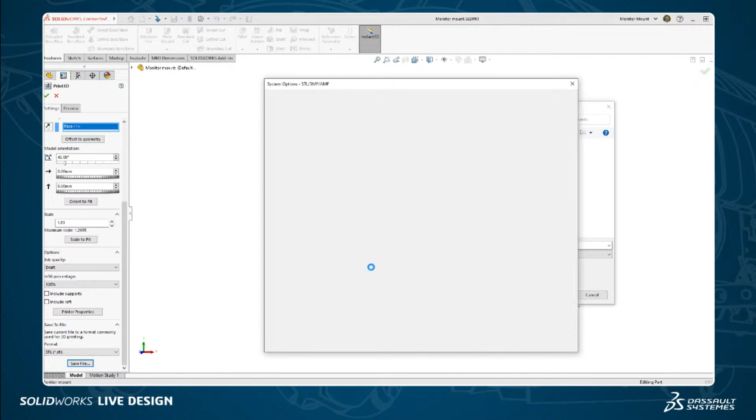As a comparison, just to drive the point home with 3MF, notice that with 3MF I don't only have those resolution options, but I also can include materials and appearances and slices inside that file, and that can help things downstream if I want.

So Mark, there was a question in chat from - I'm not going to try to pronounce it. The question was, is this an actual slicer? I'll let you answer because I think what we're doing here is something a little bit different. But somebody asked, does SolidWorks have its own slicer?

Yeah, it does. Again, it just depends on your workflow. But some 3D printers will take these 3MF files directly and just start printing them. So this 3MF is a huge jump in the technology that we've been using for 3D printing, which has been going for decades now. This is huge.

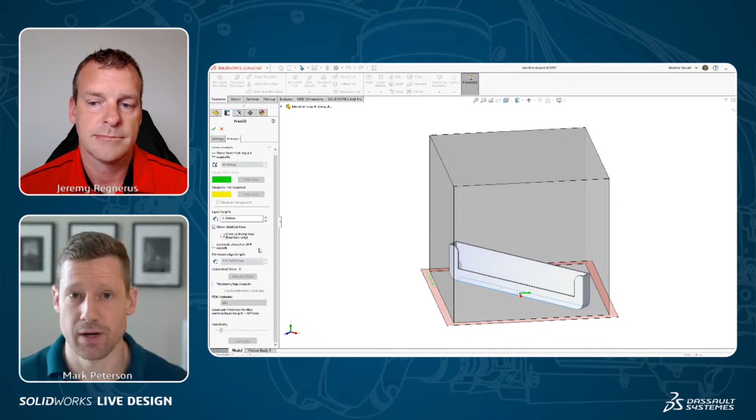More and more 3D print companies like Stratasys and HP, all these big ones, are part of the consortium that has generated this file format, and their printers do support this type of thing. But again, it just depends on your workflow and your tools.

Very good question. Okay, so I did mention that I can take this STL file, for example, and I'm just going to take this and drag and drop it. Actually, before that, let me just refresh this.

This is my 3D Experience dashboard here, and I just wanted to refresh it to show you these are the files I just saved up to the 3D Experience platform in my space. I was mentioning before how if I'm collaborating with other people, they can have access to this information.

So here's Dan Designer, for example. Dan, in this scenario, let's say he's the person who has the 3D printer, and I want to collaborate with him. If Dan has SolidWorks, he can open these files directly. If he doesn't, I can just drag these over here, and now I have the STL file up here as well for Dan to use too.

So that's great. I would show Dan's perspective on things, but for right now, because we are short on time, I do want to cut to the chase.

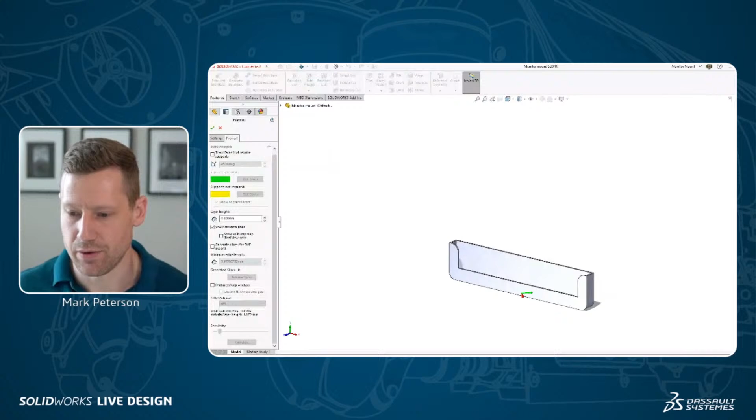So let's go back to SolidWorks. Something Dan is going to come back to me with is, when he slices this part, it's going to take maybe 4 or 5 hours to print. So Dan would like for me to try to create a revision of this that doesn't take so much time.

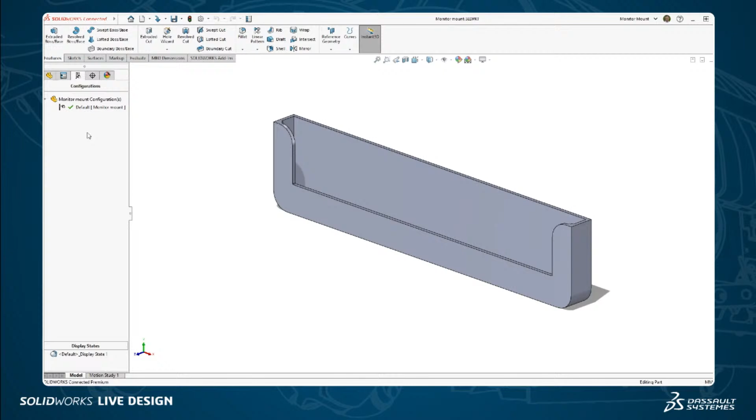And that's no problem, I can pretty easily do that. Now, in traditional SolidWorks desktop, the first thing you would probably think you want to do is go straight to the configuration manager and create a new configuration out of this. That could work, but configurations make more sense when you think about maybe wanting a different wall thickness, or maybe a different thread type.

That makes a little bit more sense for configurations. But because I'm using the 3D Experience platform and it has a lot of these product data management tools built into it, I can instead go down here to my lifecycle options, and I can create a new branch.

This is something most SolidWorks users are probably very unfamiliar with. What this allows me to do is try a bunch of different designs, different pathways, different ideas for how I want something to end up in the future. Then once our team collaborates and looks at all the designs, we can say design C is the one we prefer, and merge all those back into the design stream and continue on. This is a really powerful tool.

I just want to quickly show off what this looks like. So I'm going to choose a new branch, and then let's just give this a name. I don't know, we'll call it...

3D print. Oh, I'm getting notifications here. Sorry about that, we're working over here. This is live. Someone just removed one of your dashboards, it looks like. No, don't remove my dashboard.

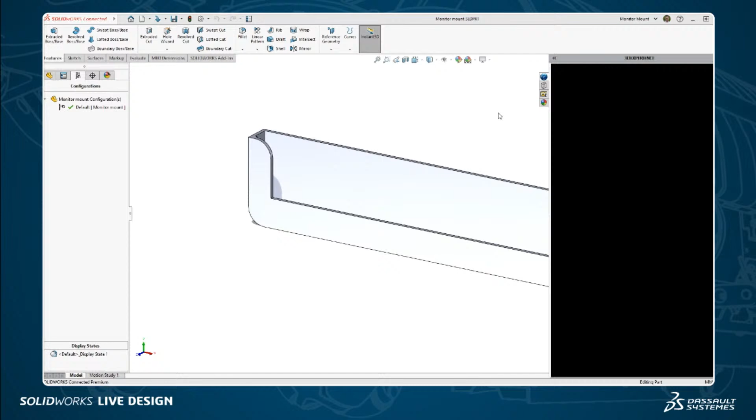All right, I'm just going to call this 3D print, and say branch. Okay, so that's that. Now I still have the old file open, so I want to open the new file. Let's close this out and open up the new one. We'll make some quick changes, and then log off pretty quickly.

All right, just load this up, and it's doing some loading there. This is just going to the platform, and it's going to try to find stuff for me. So let's look for 3D print. No results found. Sometimes it's in my recent content here. Okay, all right, there it is. What is it doing to me here? Okay, let me just double check something here real quick.

Okay, well since we're here, notice that I do have monitor mount 3D print. So these branches are all available. They're different, what we call physical products in the 3D Experience platform. They're all available, so anybody that has access to this collaborative space has access to all this stuff.

So let's go back to SolidWorks. Let me just try this one more time. There we go. Sometimes it can be a little bit slow on me. There we go, there it is. Okay, I don't know what was happening before. All right, we're going to open that up.

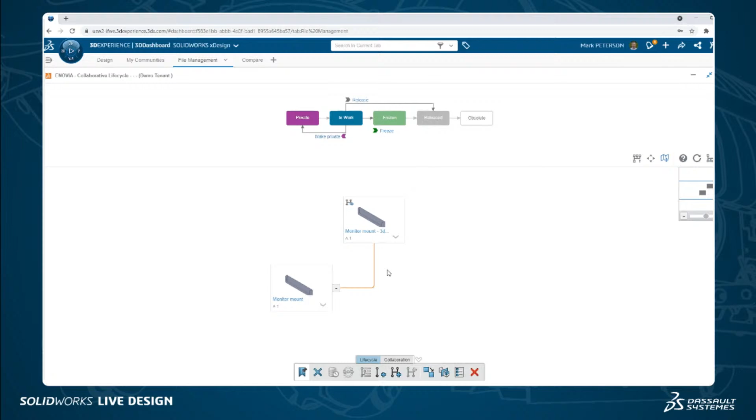This is a really cool visual way to show this. So here's kind of this little branching off. That's the monitor mount originally, and then we're branching off. Any of these design iterations you want to try, you can see this graphical representation of all these things branching off. And once they all come together, you can also see that graphically as well, which is just really, really cool. So all right, let's go back, we'll make our changes here.

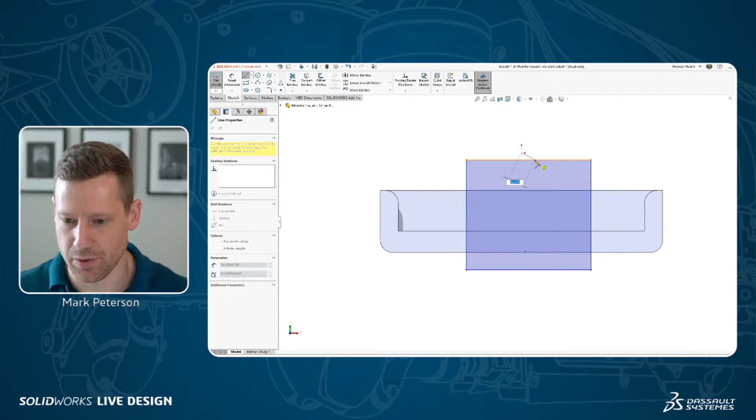Let's just do a sketch here, and we'll do a rectangular sketch. Boom, something like that. I'm kind of rushing through this last part because I do want to show the final result here. So I just want to center this. Let's make that vertical, and all right, we'll just do a quick extruded cut.

Now you might think, uh-oh Mark, you're just going to cut right through everything, but that's not what we're going to do. We're going to change this, use flip side to cut, and that's just going to cut everything outside of it. Boom, and there we go. We would add some fillets and so on, but ultimately that is the part.

We do have to move on, so I'm going to just quickly go back to my PowerPoint and show you what that looks like as it builds here.

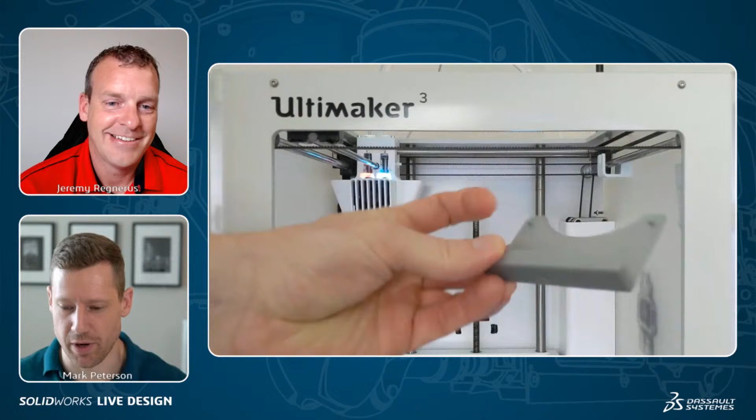Obviously a little fast forwarded, huh? That is a little fast forwarded, yes. Oh, there it goes, let's continue. Yeah, that's not the speed of my printer, but that would be amazing, that would be really great. So I think this took maybe an hour, hour and a half to print that. And there we go, that's my hand. I'm going to be a hand model one day. Yeah, and there's my 3D printed part.

Okay, so very good. So that's the part there.

Perfect, there we go. So hold on, let's do a full shot. So you got the real part up there in your hand. Yep, cool. So that's my quarter-inch thread, we're just gonna thread that in there. Boom, that's cool. Then your monitor.

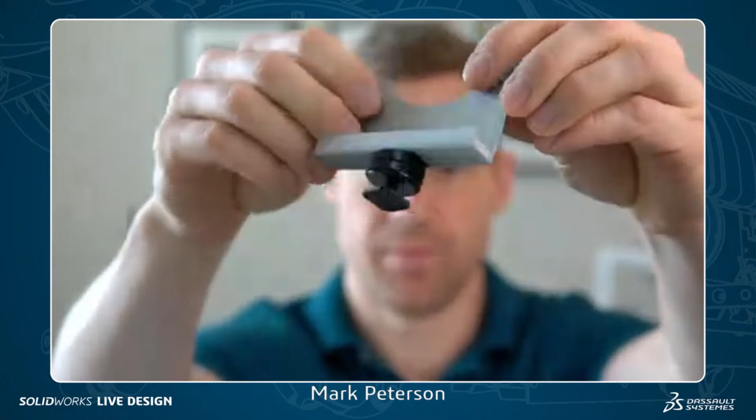So I noticed in your actual final product you have a couple little bosses that stick out. Is that just to add a little tension to the monitor? Yeah, so on the back of the monitor stand is a VESA mount that I didn't have time to show, but that just keeps it from sliding back and forth left and right. And that's pretty much it.

So that's the final product, that's what it looks like, just applied to the top of the monitor. And here's a little video of some of us having a quick conference call, and notice where my eyes are, they're sort of up towards the camera. So it's just being a little bit more engaging than staring down at your monitor while you're having a conference call. And I think especially now, when we have a lot less physical connection with people, it's just so much better to be able to look at people when you're talking to them over teleconferencing. So anyway, that's that.

We do have to go, but maybe we have time for one or two quick questions. Yeah, that was awesome, Mark.

There were great comments before Eric had to leave. He said the sketch picture tips alone were worth the time here. I think a lot of people were interested in how the thread tool works with 3D printing, and that's a perfect example of when you would use that thread tool. We've had a couple comments about future topics, and more 3D printing CAM is one of them.

Oh cool, yeah. Our producer put it in chat, we actually did a SolidWorks Live last week with Mike Buckley and John Milbury, where we went through a bunch of CAM tools available to SolidWorks users from Delmia, and we actually machined a part out at the end of that show, which I thought was really cool.